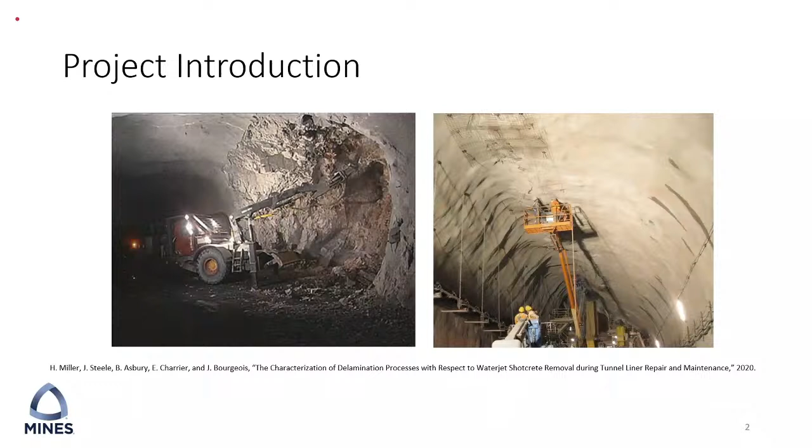So there's significant potential for this type of work to increase due to current operating trends in the mining and tunneling industries. Dice que existe un potencial significativo para que este tipo de trabajos aumenten, en todas las operaciones actuales en la industria de la minería y de los túneles.

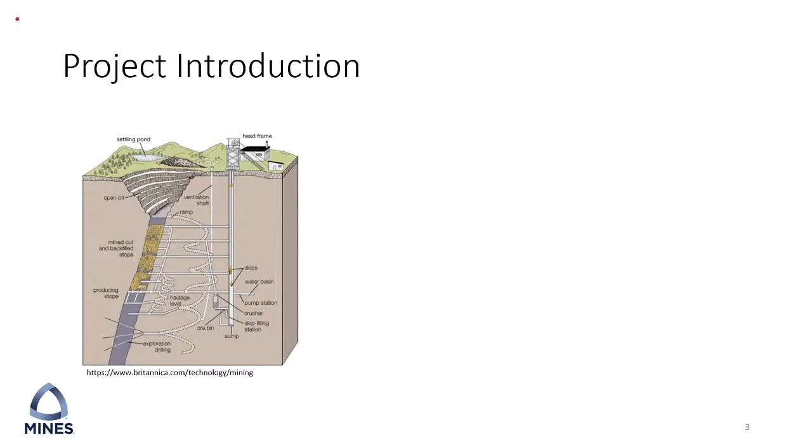Given the risk and economic challenges associated with exploration and development of new mineral deposits, there's a movement within the mining industry to mine at increasing depths within pre-existing operations and to rehabilitate previously abandoned workings in hopes of developing new resources. Él menciona que debido al riesgo y a los desafíos económicos asociados con la exploración y el desarrollo de nuevas minas o nuevos depósitos minerales, dentro de la industria minera existe el interés de llegar a profundidades cada vez más grandes dentro de las operaciones que ya existen, con el fin de rehabilitar los trabajos que se encontraban abandonados y así poder encontrar nuevos recursos o nuevos frentes de explotación.

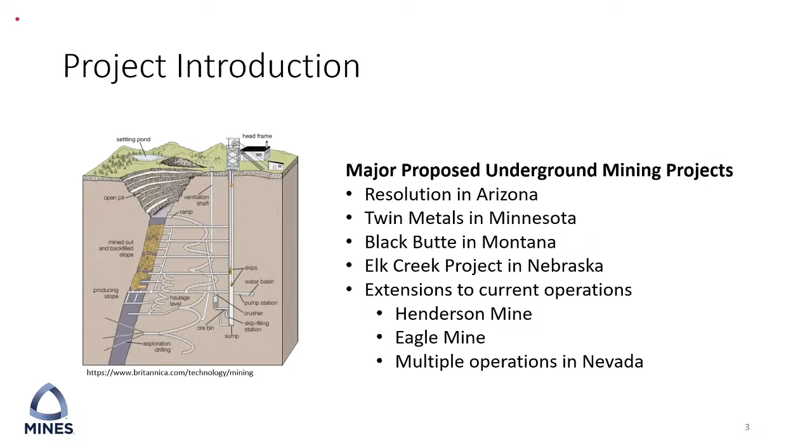And with regards to the underground construction and tunneling industry, large-scale development is occurring more frequently in urban environments for transportation, water storage, and utilities. Con respecto a la industria de los túneles o construcciones subterráneas, él menciona que se está produciendo con mayor frecuencia en entornos urbanos, con la aplicación para el transporte, almacenamiento de agua o incluso para los servicios públicos.

Overall, with both industries, higher demands on ground support, specifically through the use of shotcrete, are necessary to reduce instances of ground falls and support failure. Él menciona que en general, tanto para la industria minera como para la industria de la tunelería, la parte del sostenimiento es muy importante, sobre todo en el uso de concreto lanzado, para garantizar la seguridad de todos.

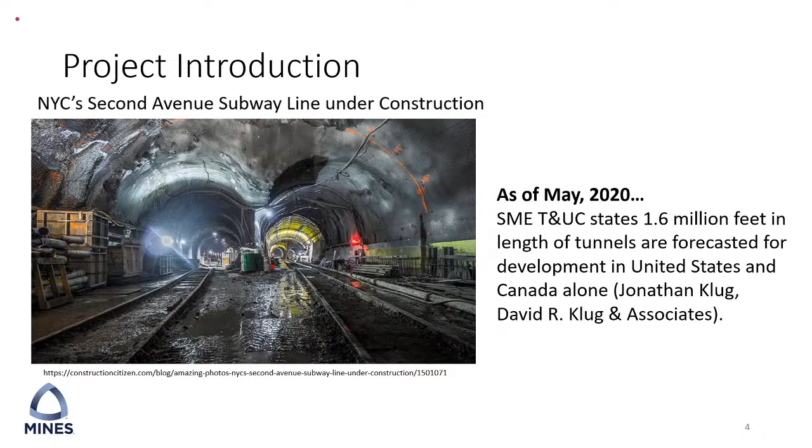According to MSHA, ground falls have accounted for approximately 16% of non-fatal lost time injuries and 35% of occupational fatalities for U.S. underground metal mining operations, from 1983 to 2018. Él menciona que de acuerdo con MSHA, aproximadamente 16% y que existen alrededor del 35% de fatalidades relacionadas con las actividades subterráneas.

So could you please correct me with the percentage? I want to make sure. So existing 16% for non-fatal lost time injuries, and then 35% for fatalities.

Ah, ok, perdón. Es 16%, no con el tiempo, sino 16% de daños que no hayan incurrido en ninguna fatalidad, y 35% es más bien accidentes que han incurrido en fatalidades, acorde con MSHA desde 1983 hasta el 2018. And so overall, this makes it a major underground hazard.

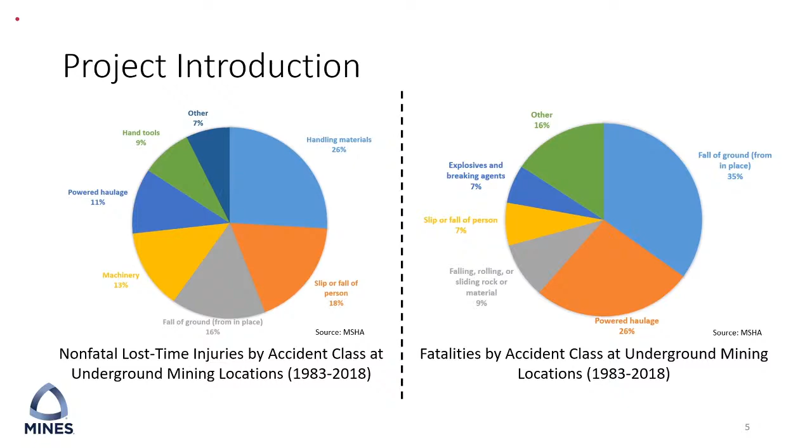Él menciona que en su grupo de trabajo aquí en Colorado, la intención primaria del problema de esta investigación era tener un mejor entendimiento de todos los procesos que se llevan a cabo durante la excavación y que se encuentran asociados con la reparación del concreto lanzado y el revestimiento, con la esperanza de tener un futuro sistema piloto que se pueda aplicar a diferentes pruebas en campo.

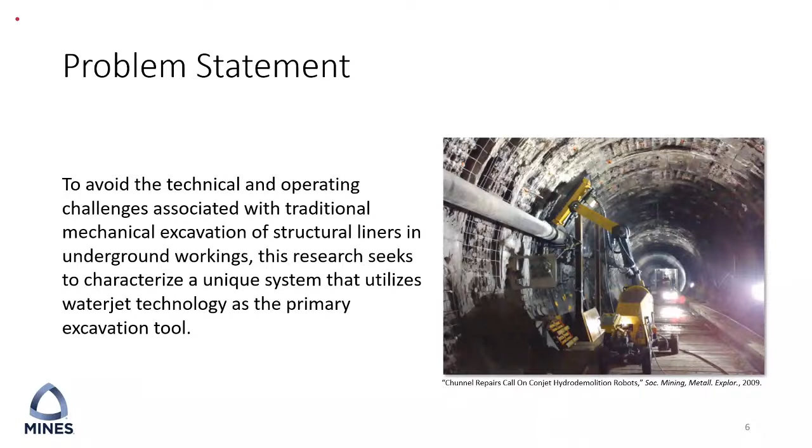And so we had two research objectives. The first one was to characterize the excavation process associated with removal of deteriorated shotcrete within reinforced underground structural liners using Waterjet technology.

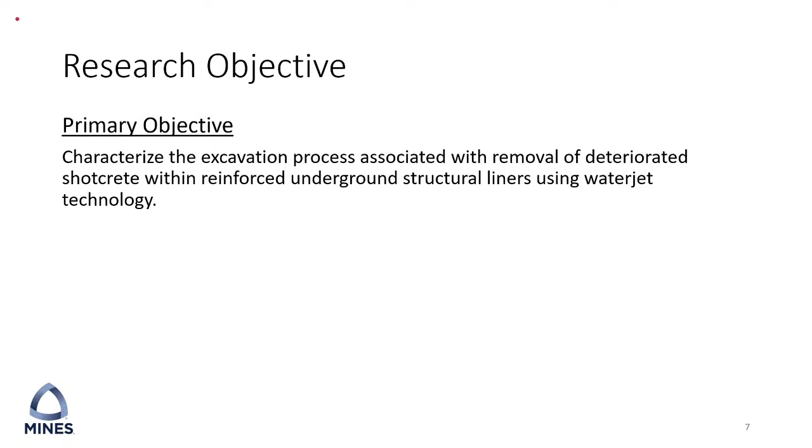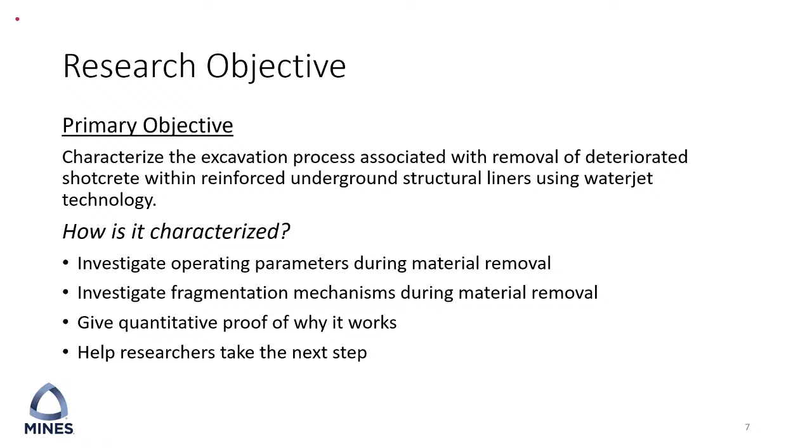Along with that, our secondary objective was to validate the hypothesis that Waterjet removal of these liners will result in less collateral damage than conventional methods, and this would be accomplished through empiric testing of simulated shotcrete removal.

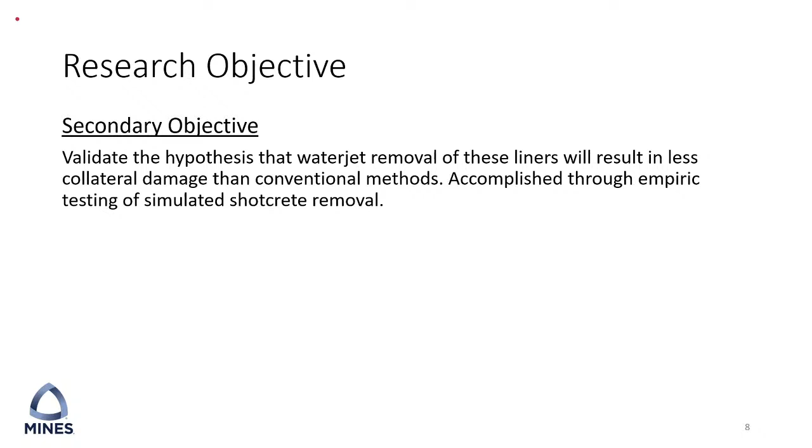During this testing, we were looking for the geometry of the material removal process between both impact hammer and Waterjet methods, as well as the differences in delamination and damage to the steel infrastructure, fracture propagation, or instances of microfracturing. And then we also wanted to look at the bond surface that was left as a result of each testing method.

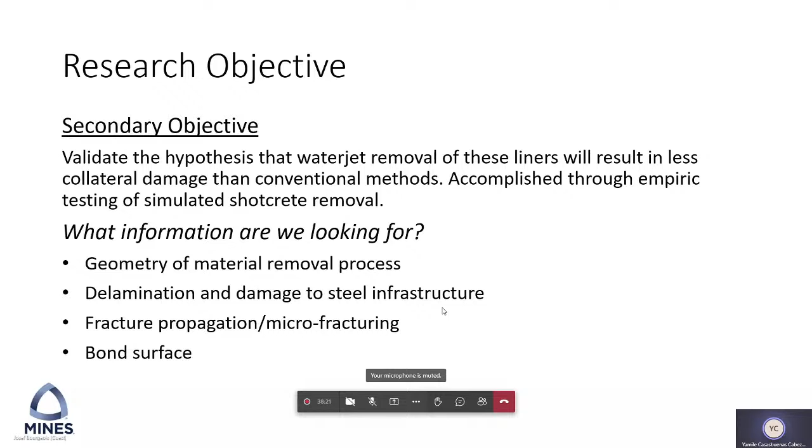Awesome, so these are the fun slides. No more introduction. Now we'll move on to the testing.

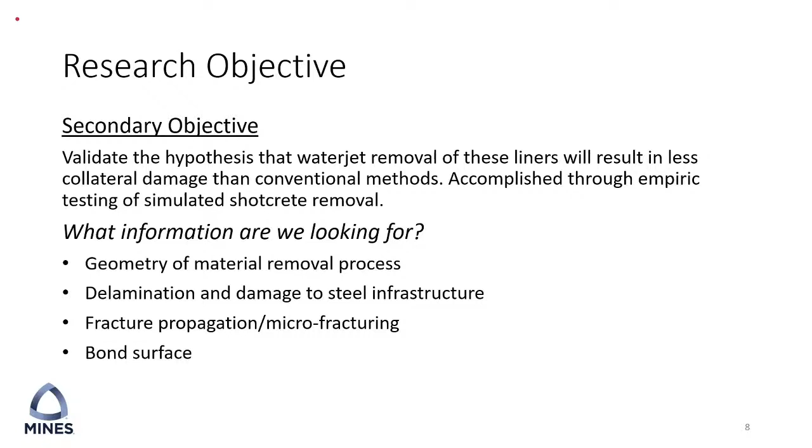Under the testing methodology, we built 7 individual composite panels that comprised of 6 inches of rebar reinforced concrete and 4 inches of wire mesh reinforced shotcrete.

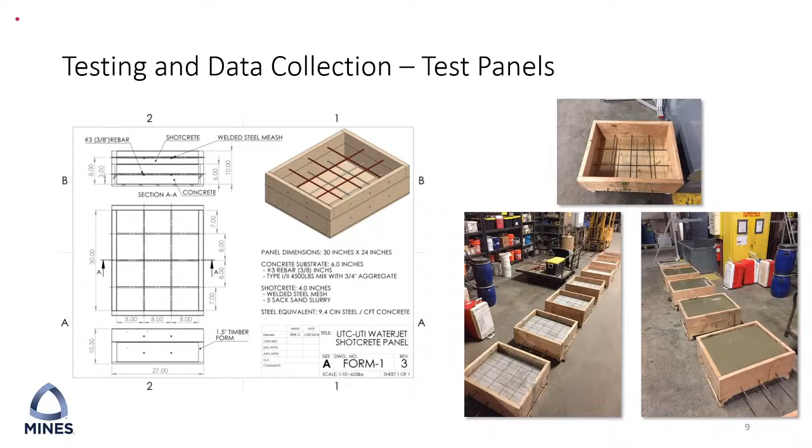And so we had a USB data acquisition system that recorded vibration readings from 7 accelerometers, which were mounted on the exposed ends of the rebar in the panels.

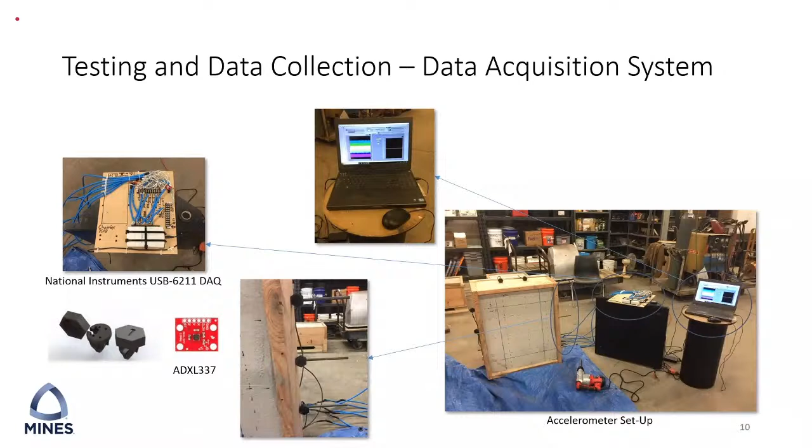So we also used ground penetrating radar to perform non-destructive analysis of panel properties before and after testing, which was our way of visualizing any deterioration in the concrete, also known as the substrate layer.

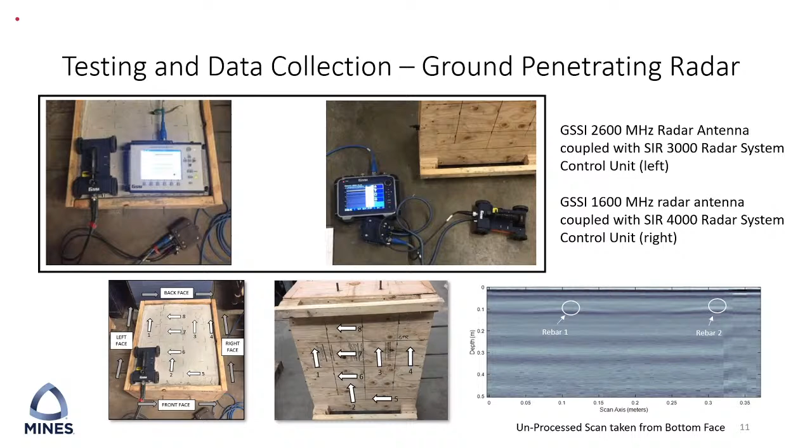Okay, so now we'll talk about the testing process. The impact hammer excavation was conducted using a Bauer rotary hammer with a 1-inch concrete spade chisel. It was rated at... I guess I could stop there.

Okay, yeah. So basically, in this case, a rectangular cavity was cut into the center of each panel and excavated to the top of the concrete layer.

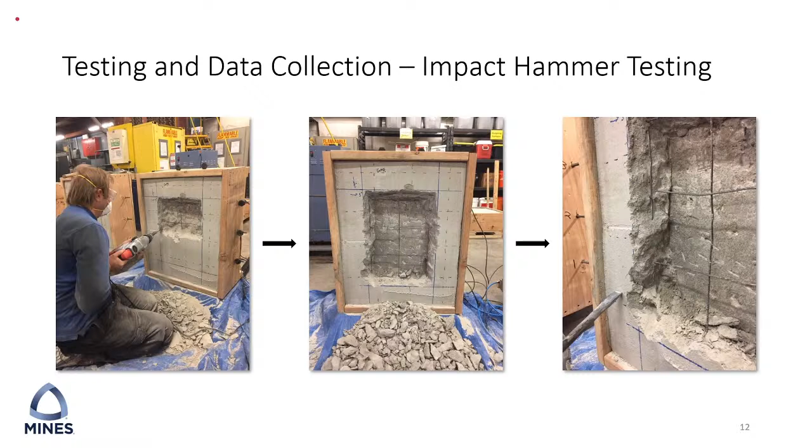Can you repeat it again? Sorry. Oh, that's okay.

And this will be just a little bit different than some of the notes too, but with this type of excavation, the panels were manually lifted by a hydraulic lift to elevate the panel relative to the jet assembly.

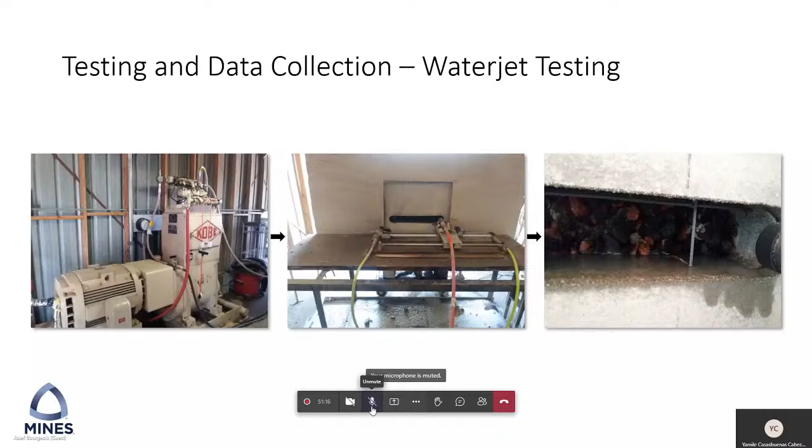Okay, and then yeah, so in the end, basically through the entirety of Waterjet operation, the 150 horsepower pump consistently operated around 27,500 psi.

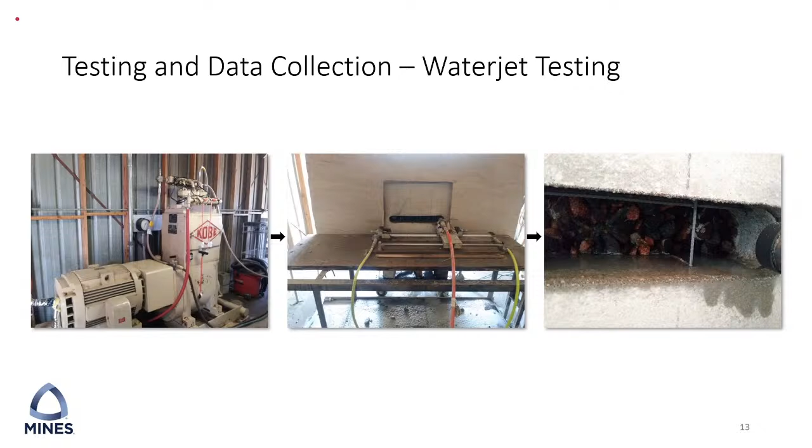With those types of testing that we did, like I said before, we were just keeping track of the operating parameters during testing for water jets. We're just saying that there was no notable difference in how deep the jet cut when the standoff distance was between 3.5 and 7.5 inches. The standoff distance is the distance between the nozzle and the target material, which was approximately 0.3 to 0.2 inches per pass.

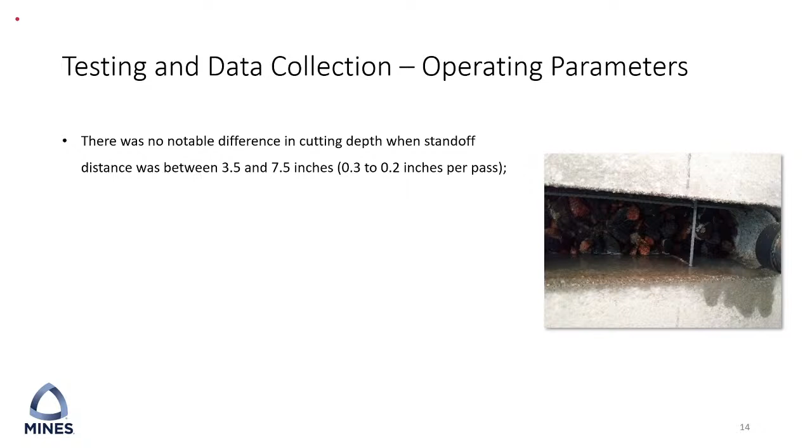We also noticed that during testing there were relatively higher vibrations in certain conditions. When the standoff distance was below 3.5 inches, we would get higher vibrations. When the nozzle of the jet was stalled at the endpoints of the traverse, we would get higher vibrations. And also when the nozzle would travel across areas where there were free surfaces, that was also a time when we would see higher vibrations.

The last thing we noticed is that it is possible for the muck or the accumulation of the cuttings and water to limit how the nozzle would traverse across the slide, just because the muck would collect on the slide itself. So that's just one thing to keep in mind.

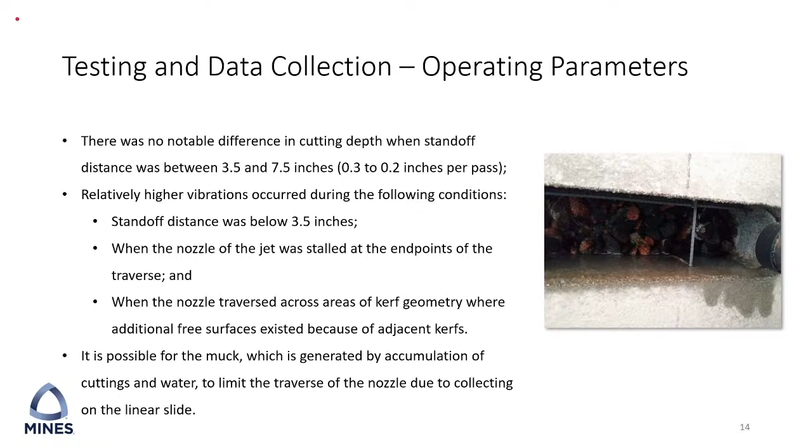Okay, let me see if I can remember all. So, sorry, yeah. No worries, okay.

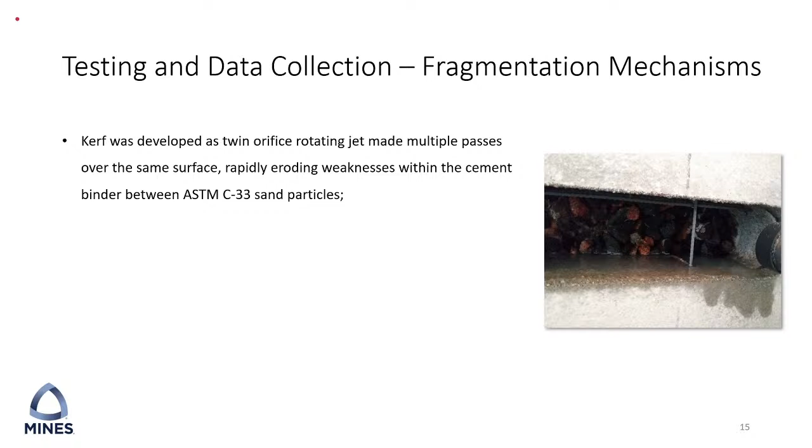One thing we noticed too is that it left a clean cut slot with smooth walls, which is very similar to literature we've seen before.

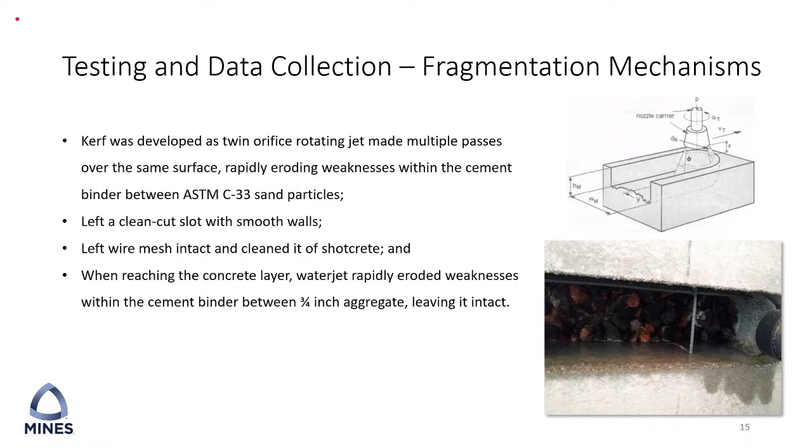One thing I want to say is that on one of the panels, ribs of shotcrete were left between jet passes, and this would happen when the jet assembly was stalled at the end of the traverse. (Spanish translation: this occurred generally at the ends when the hydrojet stopped and air was injected into the panel.)

All I want to say here is that this situation can be fixed if you just change your operating parameters of your Waterjet. In this situation, you don't want to stall the jet, you want to keep it moving. (Spanish translation: this can be repaired by changing the operating parameters so the hydrojet moves constantly and doesn't stop at certain points.)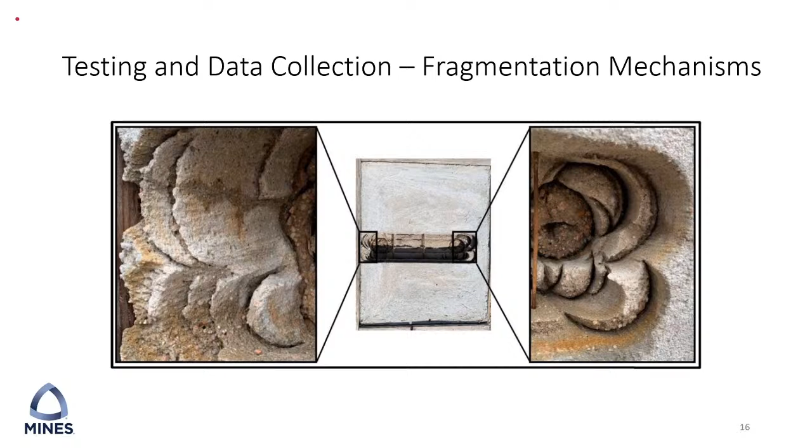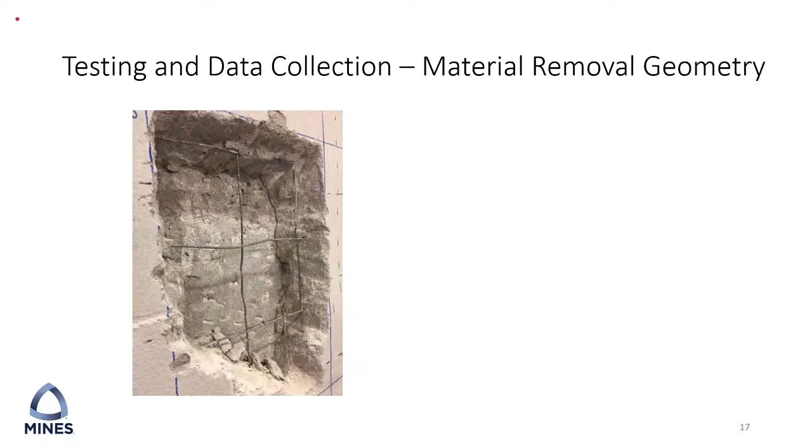In comparison, with impact hammer excavation, the kerf or the cut was developed by chipping into the shotcrete layer, causing inconsistency in the path of the hammer. (Spanish translation: using the hammer leaves several inconsistencies, especially irregularities in the geometry.)

This would result in a cut that was difficult to navigate even though the operator could choose where they wish to remove the material. (Spanish translation: this is quite difficult to navigate through the panel with the hammer, even when the operator can choose where to remove the shotcrete material.) And there was also resulting damage to the steel wire mesh during impact hammer testing.

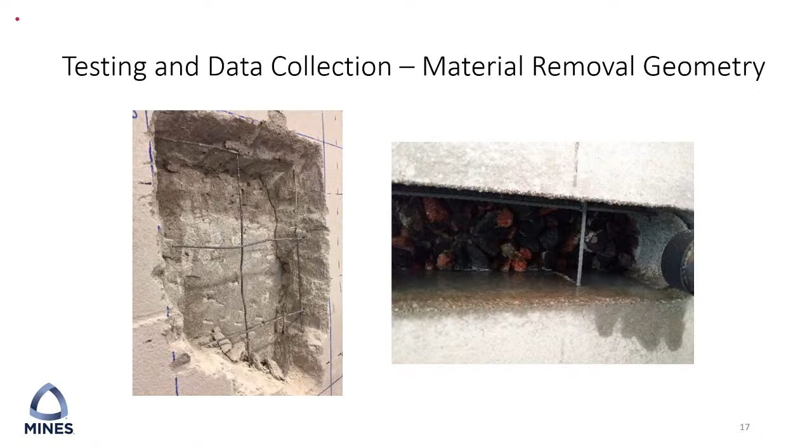With regards to the shotcrete cuttings that were generated by the Waterjet, 100% of them were measured less than 0.25 inches, and 75% of them were smaller than 0.1 inches. (Spanish translation: approximately 100% of what was cut had a size of about 0.25 inches and 75% had a size of about 0.1 inches.)

In comparison, the cuttings generated by the impact hammer were relatively larger. The main point here is that the Waterjet will produce much finer cuttings than an impact hammer would. (Spanish translation: compared to what was produced with the impact hammer, about 53 to 63% was a bit larger in size, meaning the hydrojet produces smaller particles than the impact hammer.)

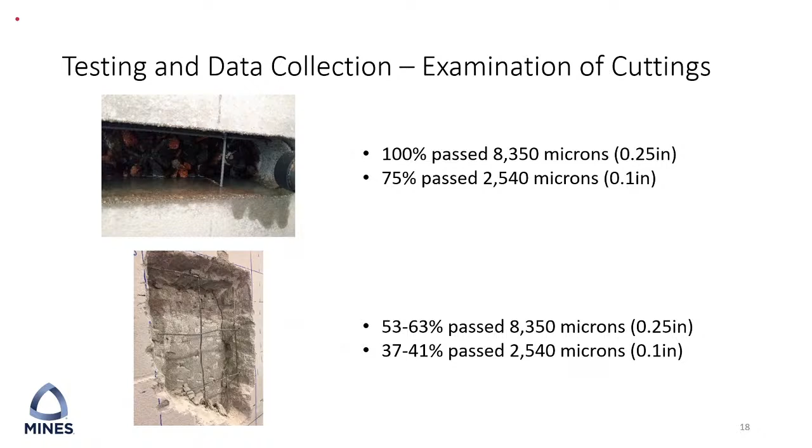Visual inspection was performed after excavation was completed on all the panels. (Spanish translation: this refers to the visual inspection performed after the excavation of each panel was completed.)

This process was accomplished in sections to analyze the entirety of the excavation profile, including all of the walls and the face where the exposed aggregate was located. (Spanish translation: this visual inspection was done in parts to review all the walls and all the parts that may have been affected.)

Here on this slide is just an example of the analysis for an impact hammer sample on the left and a Waterjet sample on the right. (Spanish translation: in these images we can see the analysis of what is left after the process with the impact hammer on the left, and with the hydrojet on the right.)

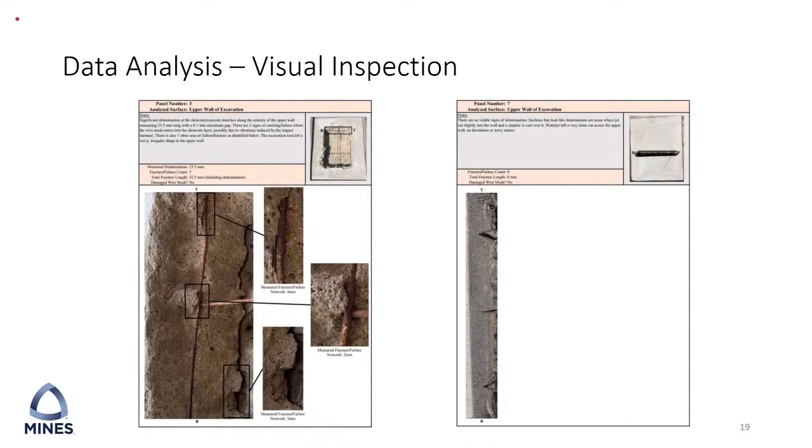So in the end, panel 3, which is an impact hammer panel, resulted in the highest measured fracture and failure, as well as the highest measured delamination.

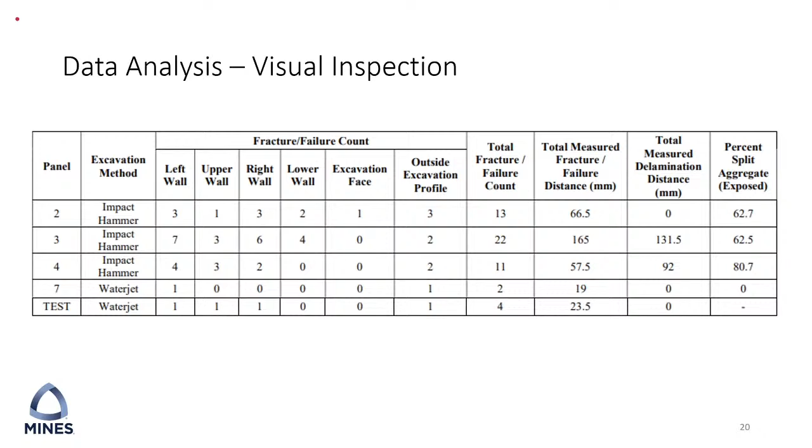So the vibration data from all of the testing was saved as an Excel file, and then I would do the post-processing of each testing sequence.

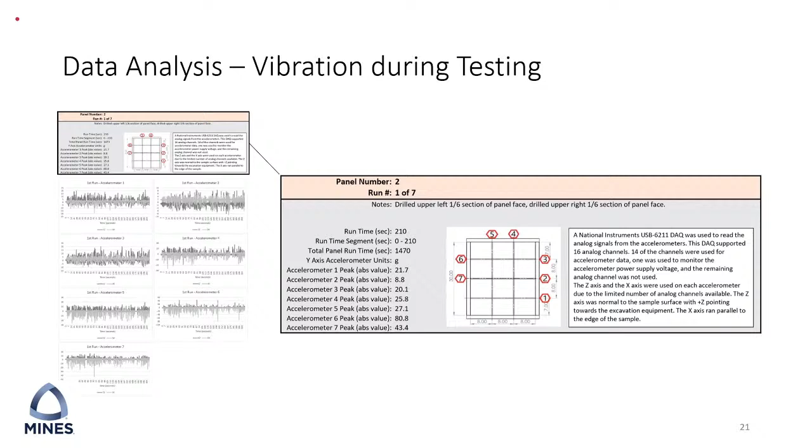So here's just an example of the highest readings for each testing scenario.

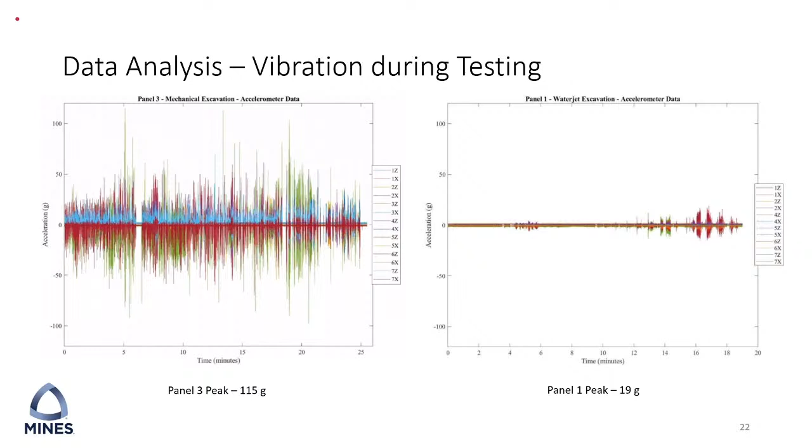This is just one more visual to show the differences in the range of vibration readings we would get between the impact hammer samples and the Waterjet samples. So once again, a big difference.

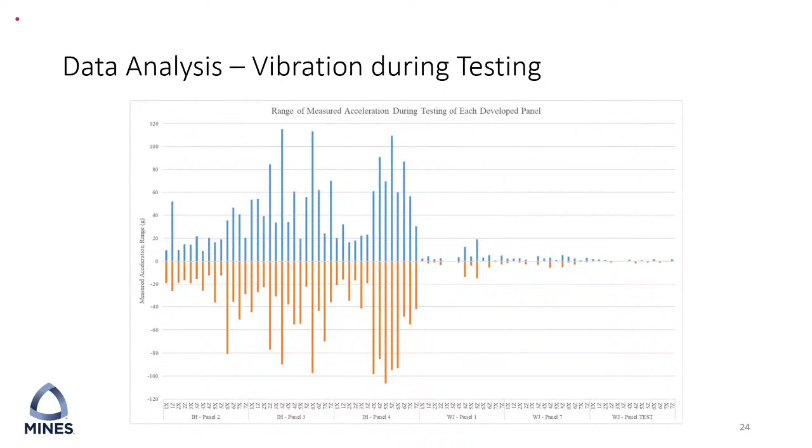So all I want to say here is that what happened with the ground penetrating radar is that when we would do the testing, the top face would be destroyed because we were excavating through the shotcrete.

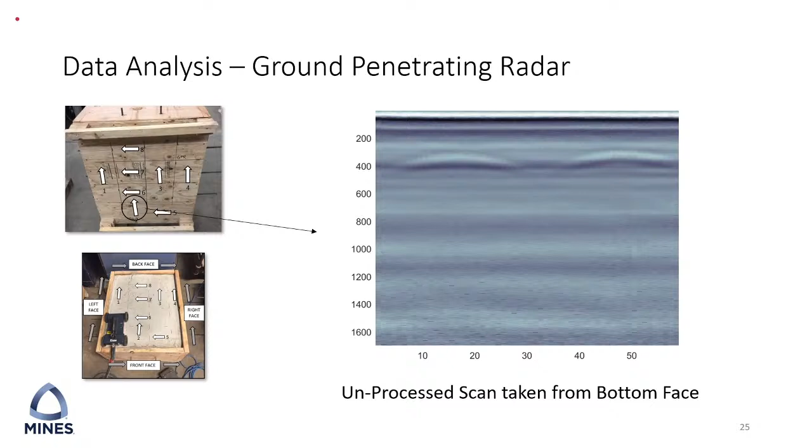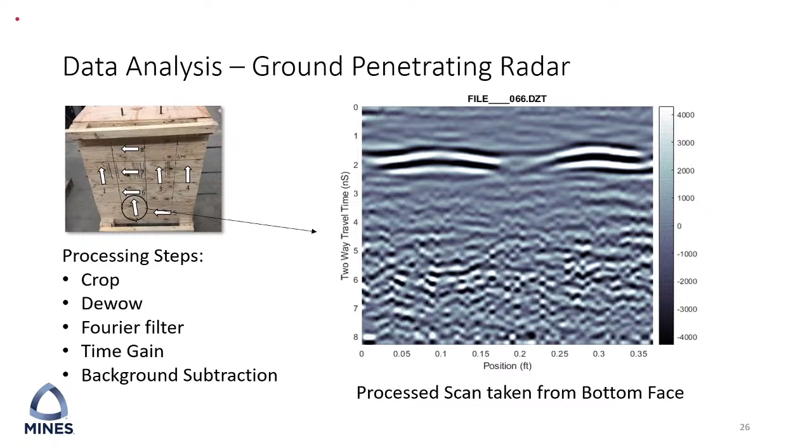And so, for example, here I was able to visualize every scan that I processed in 3D using this program called OpendTect, and I could see where each scan was located within each panel.

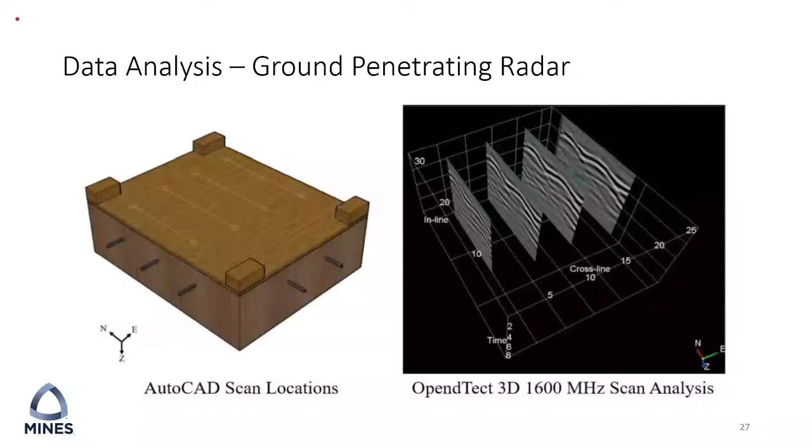And in the end, what I wanted to do was look further into a specific area of each process scan.

Can you repeat it again? What do you want to get?

I wanted to focus in on a specific area of the scan.

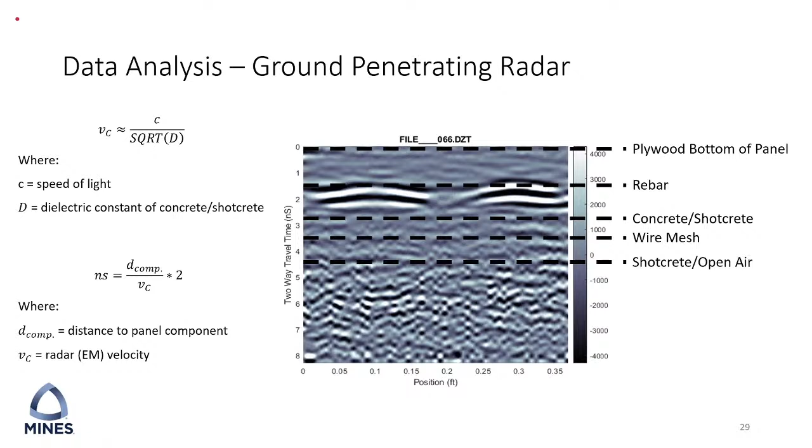And then the last step I took was I once again used MATLAB to return the upper envelope of each scan. So this was one last processing step that I took to get a better visual of changes in amplitude.

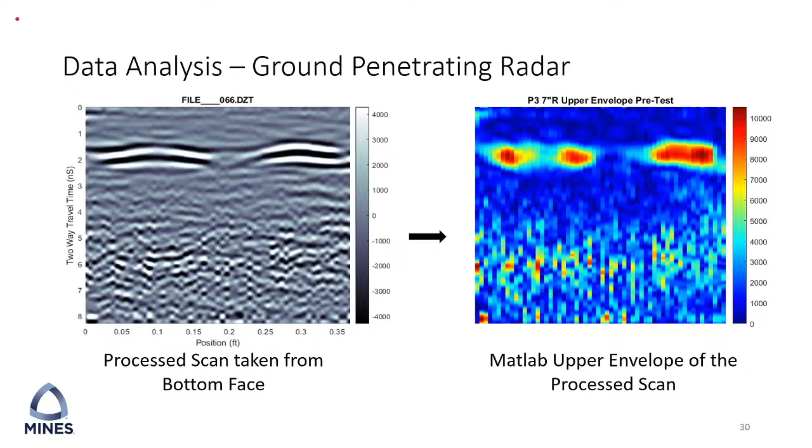So what I did was I took all of these scans and located where they were on the AutoCAD figures. That way I could see where the excavation was happening for the cross sections, and what that looks like in the scans.

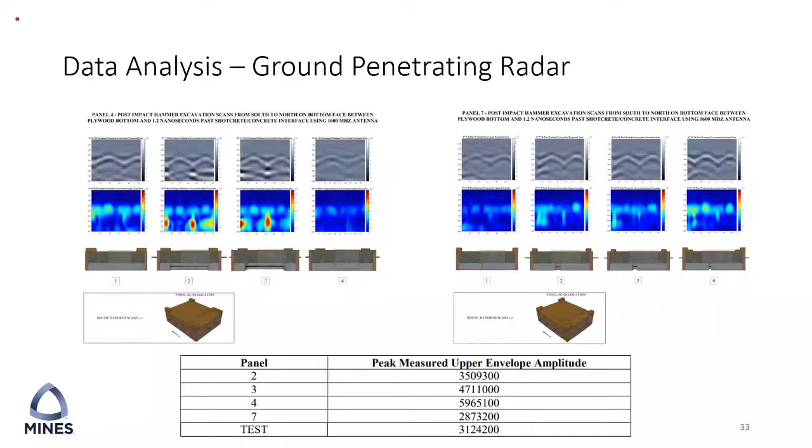And so when I put them next to each other, it's easy to see that there are differences in the amplitude strength increase within the concrete substrate for the panels, with a higher amount of amplitude increase for the impact hammer samples.

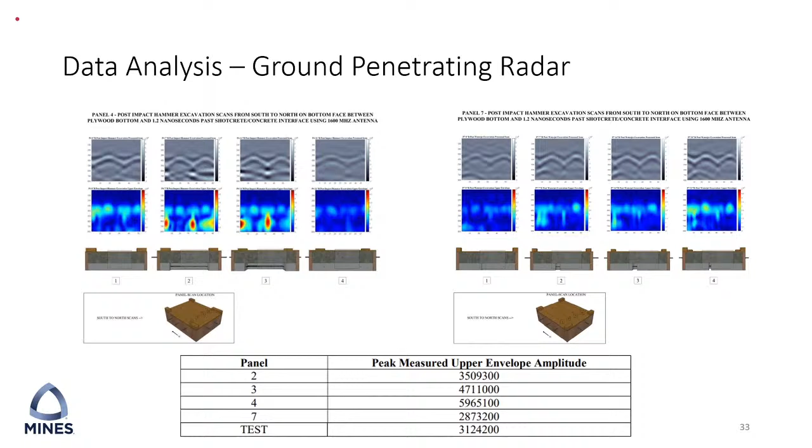And so this is the last analysis tool that we used for this research. So micro CT, also known as microcomputed tomography, was used to perform non-destructive inspection of core samples taken from two panels after testing.

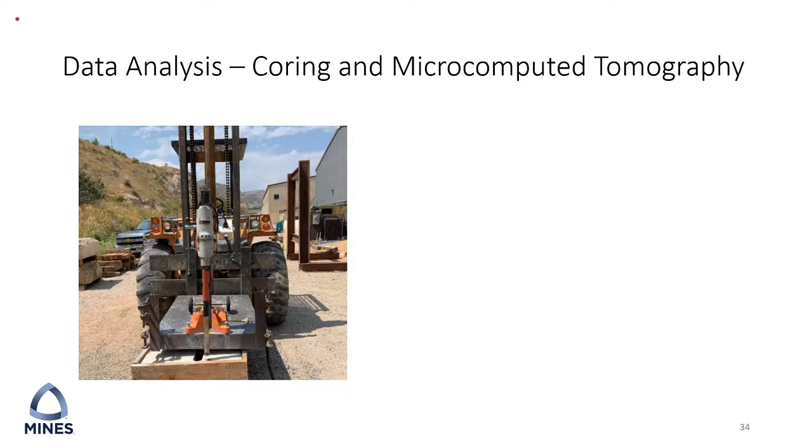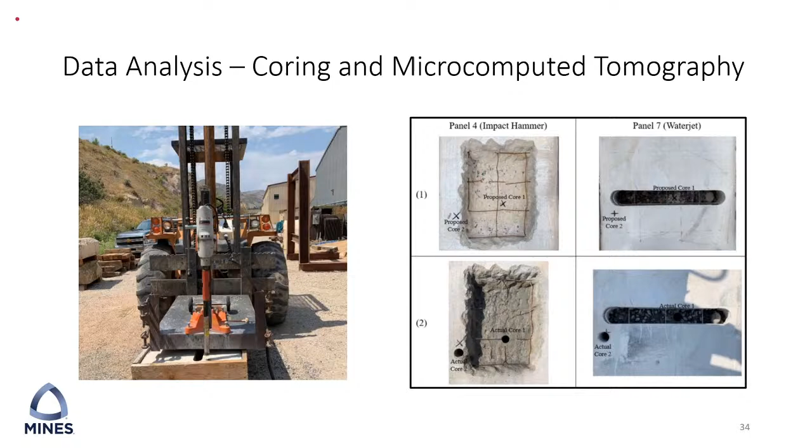So due to the availability of the scanning equipment, only core 1 from each panel was examined, and the rest of the core samples were held in reserve for future testing.

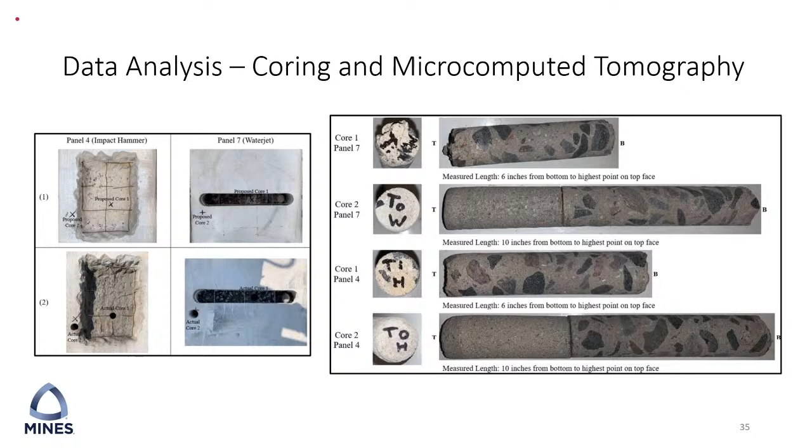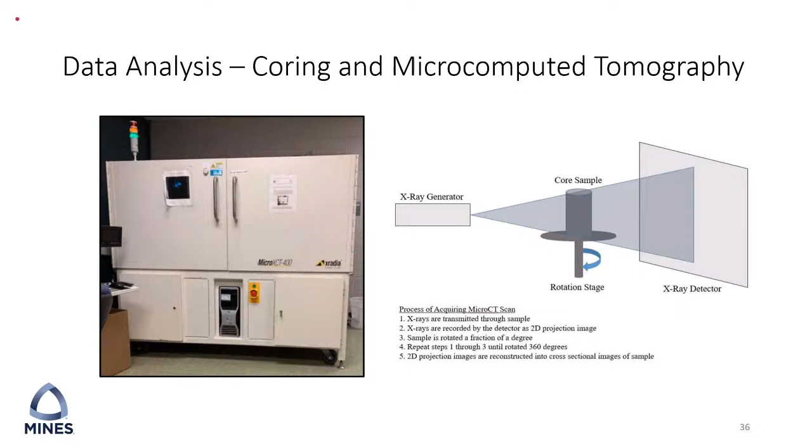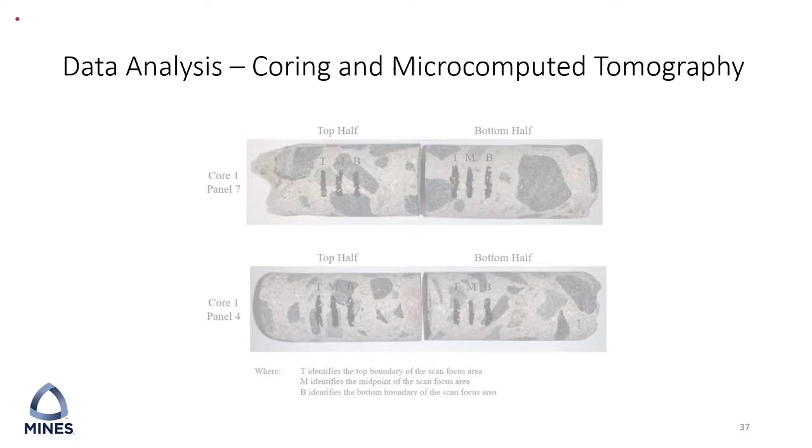So these are the chosen focus areas we decided to look at to perform the scans. As shown in the picture here, we would gather a scan from 1.1 to 2.0 inches below the top of the cores, and then 3.3 to 4 inches below the top of the cores.

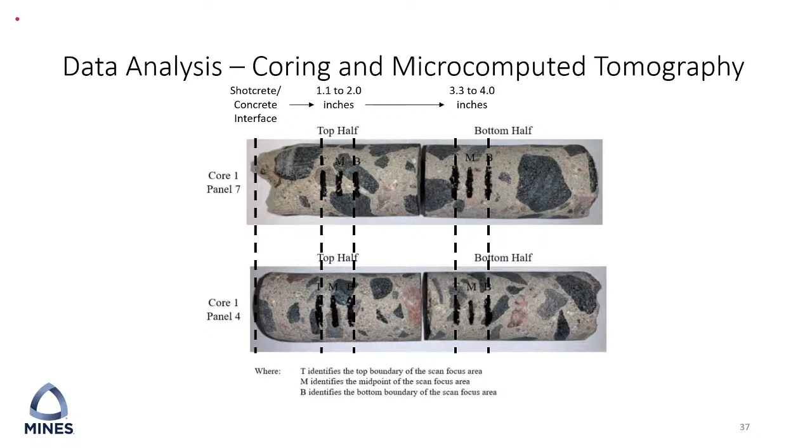Okay, so AVI files were created to present all of the cross-sectional images of all 4 cores in movie format.

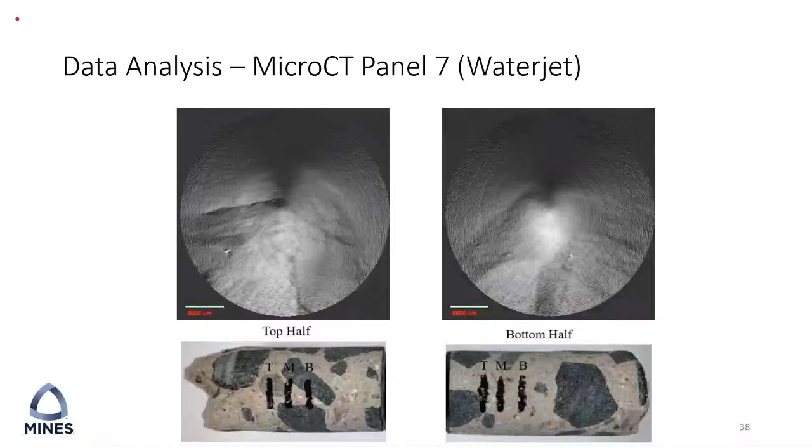And so these were the scans for the Waterjet, and the next one here is for the impact hammer.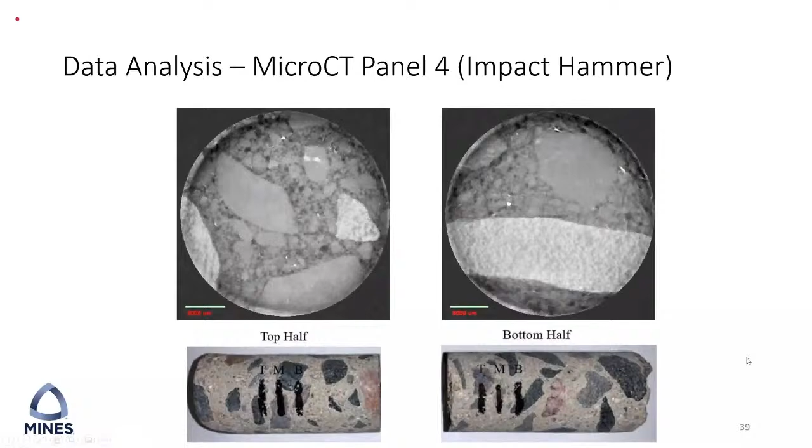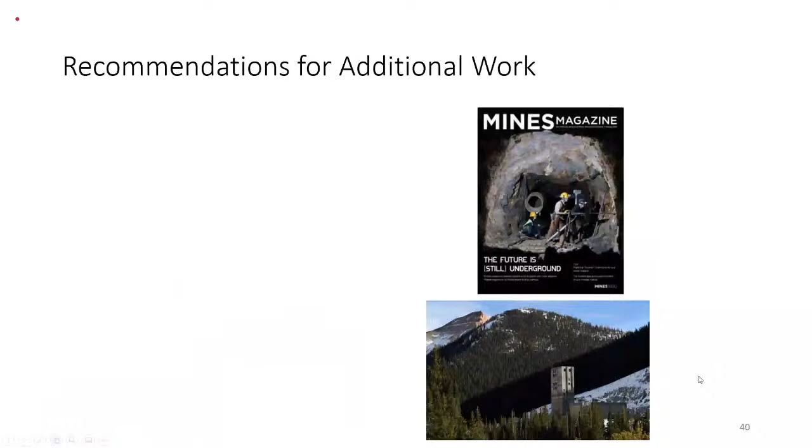All right, so in conclusion, I believe there are certain things that can be done to continue this research.

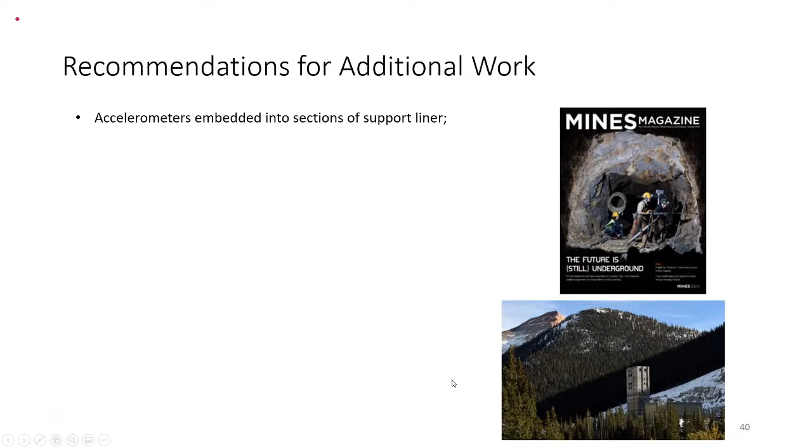I would like to still see use of ground penetrating radar to analyze the substrate of areas that need to be repaired using Waterjet technology. So there can also be more data with ground penetrating radar.

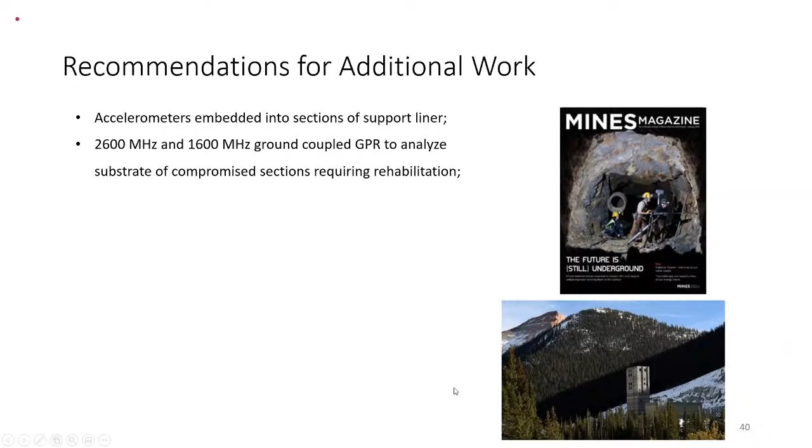There's additional methods you can use for non-destructive analysis, such as this example here. It's called ultrasonic shear wave tomography. So that's another method that could be used in the future.

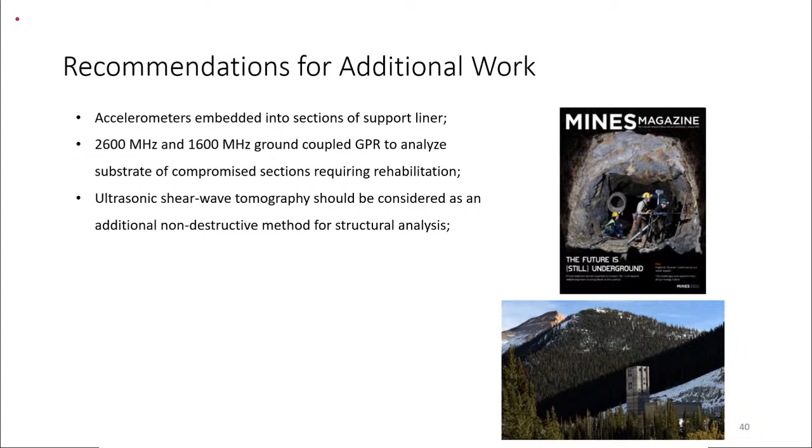You could also use liquid penetrant inspection methods. This would essentially enhance visual inspection of surface fractures or failure. It's like a spray paint that you spray over surfaces, and it'll help detect cracks. And so that would be also very useful.

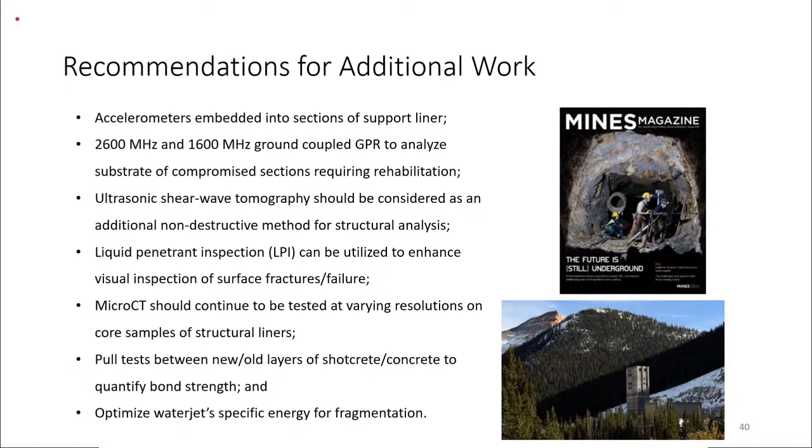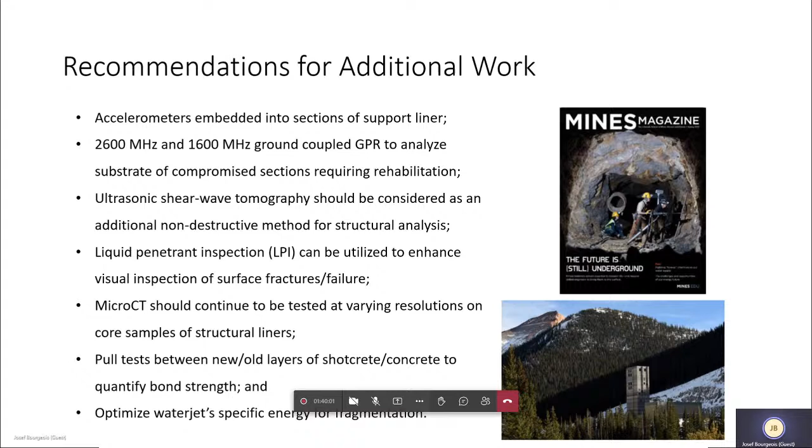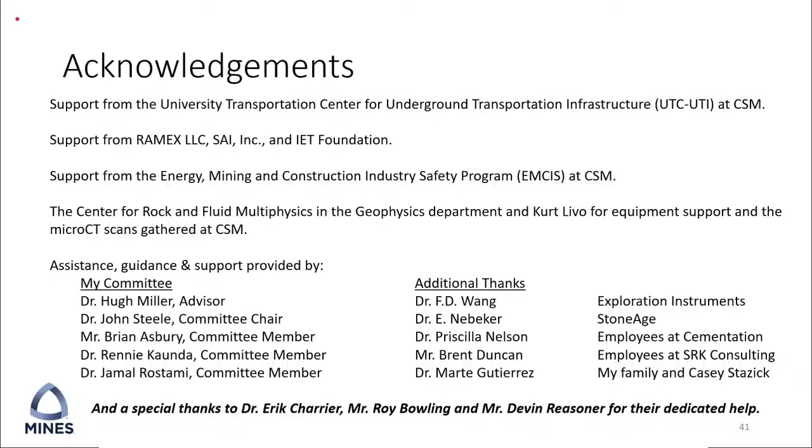Thank you to you, Joseph. I think that was very interesting and useful, and I think now we can have an option for questions from the audience. Sure, yeah, and I can say one more thing too.